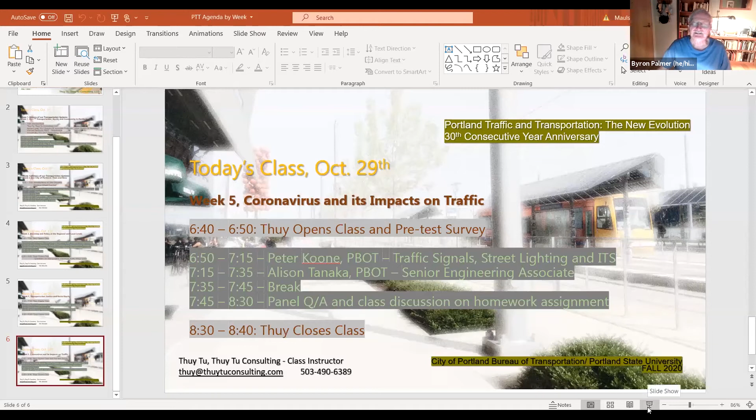I want to find out about the jurisdiction thing between ODOT and PBOT and how that works, how they interact with each other during the project. Yeah, that's a good question, because it differs. Good luck on finding that out. I've never understood it myself.

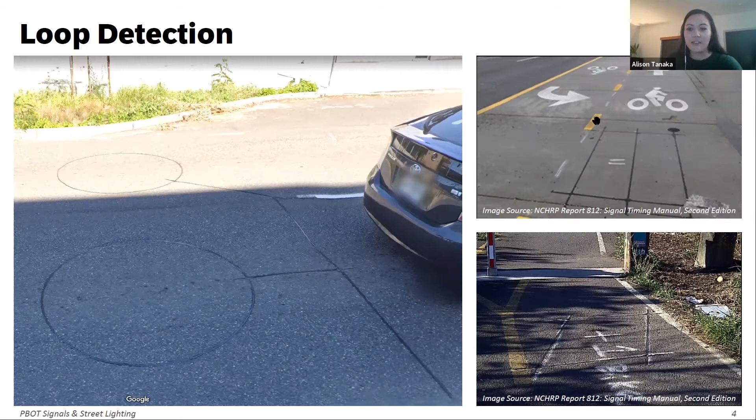So you can see examples of that on the left and right side. If you go to the next screen.

Another common way that we've been starting to collect traffic count data is through our radar detection. This is an above ground technology, and we essentially draw little zones with a software program. So instead of there being a physical loop in the pavement, we use radar technology to be able to see if a vehicle or a cyclist is at the intersection.

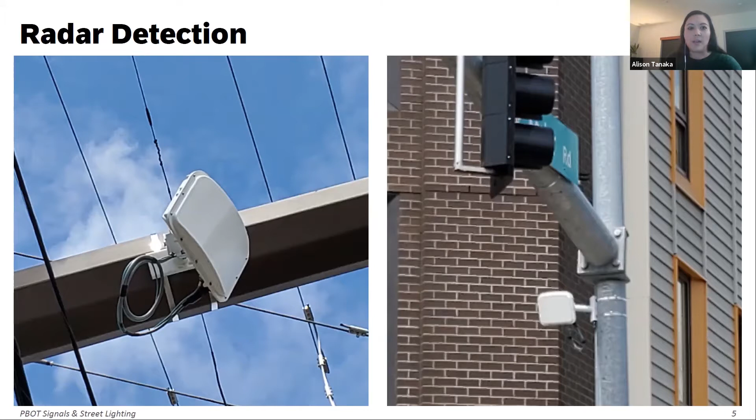And then I did mention pedestrians, and we use the push buttons most of the time to collect data about how many pedestrians are at an intersection, how many people are walking. So if you go to the next slide.

All of that information about the vehicles, about bicyclists, and about people walking gets collected in our traffic signal cabinets. There's one of these at every signalized intersection, and you can see there's a whole jumble of wires in there that go out to the physical pieces of equipment at our intersections. And then there's a large black box in the middle that essentially works as a computer to not only operate how the lights change green, yellow, red, but also can help us collect data about when those detectors are going on and off.

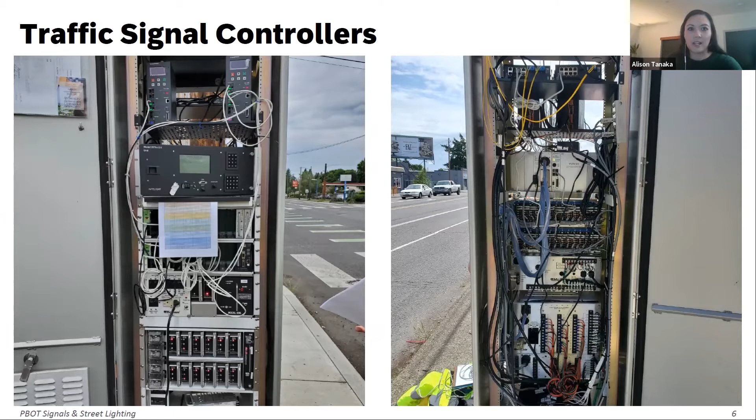So if you go to the next slide, and then maybe the next, looking at where our counts were taken, we have those in-pavement loops installed throughout the city. The best way that we can collect data about vehicles going over them, vehicles or cyclists, is to install them on the far side of an intersection so that people aren't stopped over top of them. It's better if we can get an on and then an off signal to do a count.

And so we have that type of loop detector installed at many locations, which you can see in the map on the left side here. And what we ended up doing was selecting 8 of those locations.

We needed a couple of things for our COVID analysis. We needed there to be data that was available before COVID, and we also needed those detectors to have a high communication quality, because even though vehicles might be going over top of them, if we aren't able to communicate to those computers, those controllers in the field, we can't get high quality data back.

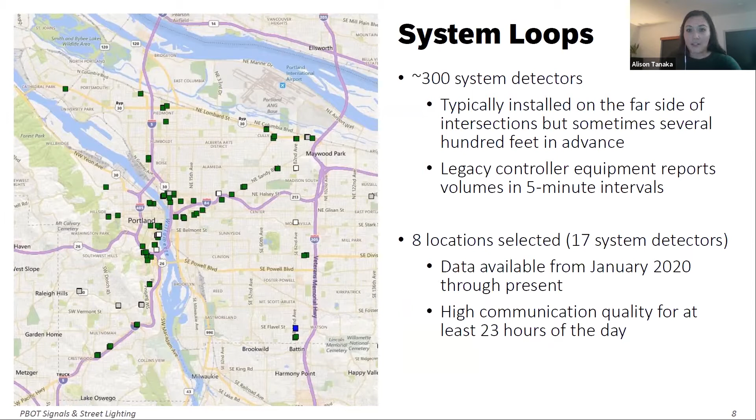So we needed both of those things to be present, and we ended up choosing 8 locations that had both of those things. So if you go to the next slide, we ended up combining those 8 locations.

We combined the physical loops in the ground with some locations where we installed tube counts. You probably noticed in different parts of the city, we have those black pneumatic tubes that go across the roadway. There's usually 2 of them, so we can tell which direction a vehicle is traveling. And those are able to give us counts as well.

We normally install them on a temporary basis if there's a project going on, in order to see how many vehicles are maybe traveling on a corridor. But for this COVID situation, we installed them throughout the city on a longer term basis than we normally would. So we have these 2 sources of count data that we could use to track our COVID traffic volumes.

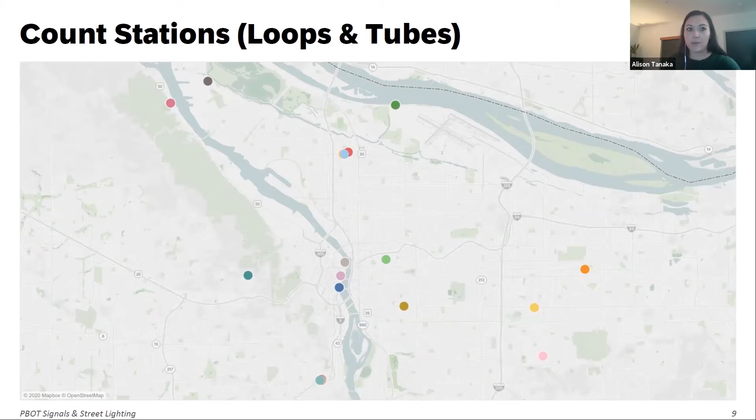So if you go to the next slide, and then maybe the next one, we wanted to look at how traffic has changed this year. This is daily traffic volume data from those 8 locations where we have the physical in-the-ground loops.

So you can see that traffic changes on a weekly basis. There's small bumps for each of those colors, and those are weekday volumes versus weekend volumes. So every weekend there's a dip in the traffic volumes that are coming through.

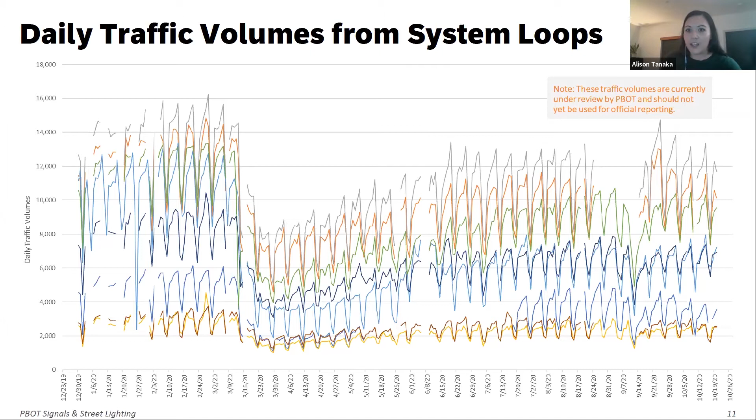So you can see that over the course of the whole year, we had a really steep drop off in March when the stay-at-home order was issued. Ever since then, traffic has been slowly creeping back up. But then we had the wildfires, which also resulted in a pretty big dip in traffic just a few weeks ago. So if you go to the next slide.

We started to take that daily data and try to figure out a way to normalize it, because some of our locations are in low traffic areas, some are in high traffic areas. And you can see that there is a big difference between all those different count locations on the previous slide.

So we needed a way to see how traffic volumes were really changing. That was what everyone was most interested in: how much has traffic been reduced as a result of COVID, and then how much is it creeping up each week.

So what we ended up doing was comparing our data to a baseline. For the loop locations that we didn't have data from many previous years, we looked at a baseline from earlier this year before COVID, before March. And for our count locations, in a lot of cases, our baseline was from previous years when we had taken a count for a project. We normalized all of that so that we had this sort of zero point to compare against for all of our locations.

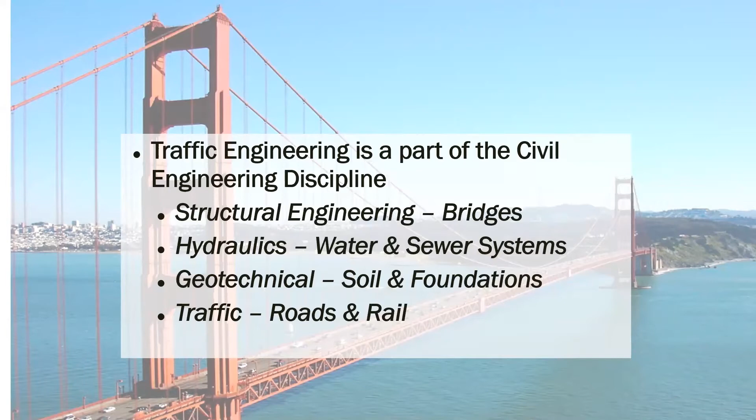Pretty easy, right? You never want it to fail. So we can define failure. I love to always point at Washington, that Seattle-Portland rivalry - look at what Washington's doing, ha ha. Not really, I'm not going to laugh at them. But they had a bridge failure - a truck hit the bridge. Luckily nobody was killed. But they had a bridge failure. I can define what failure is, and that's what civil engineers like to do. We don't want signal poles to fall over, we don't want buildings to fall over, we don't want structures like this to fall over.

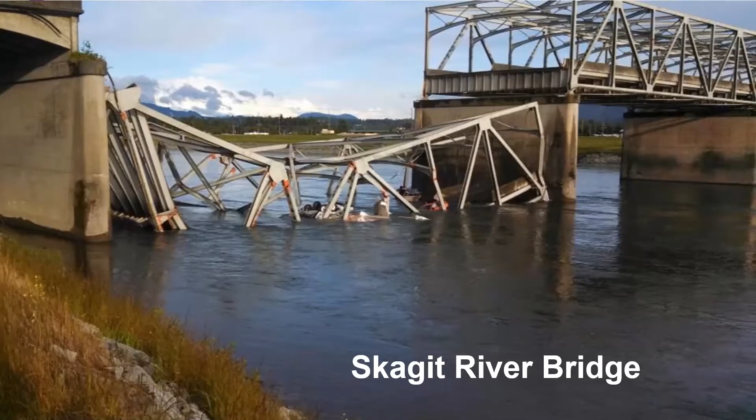But what is failure for a traffic engineer? How do we define that? All right, here's your quiz - get out your pencils. Here's your Jeopardy, we play like Jeopardy with our traffic engineering students. So I'll take Traffic Level of Service 101 for 100. So that's the question: what is failure? And I have to ask it in the form of an answer. It's the Highway Capacity Manual - that's what we use.

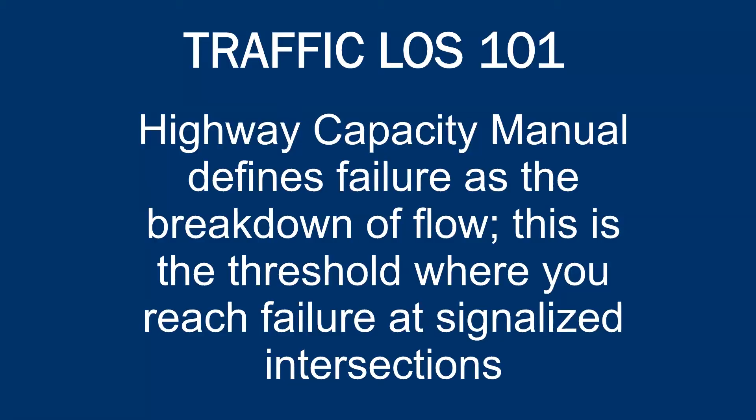It defines failure as the breakdown of flow. So what is that threshold? I asked you this poll question, so I'll give you the answer now: it's 80 seconds per vehicle. The magic number that we have defined in the Highway Capacity Manual - 80 seconds per vehicle. So think about that a little bit. What does that mean? So you're sitting at an intersection - after 80 seconds, you can call me up on the phone and say, Peter, you failed, 81 seconds. What is going on? Why are you failing all the time?

And here's my answer in reply to that: that's a terrible measure, I hate that measure - 80 seconds of delay per vehicle. The problem with that measure is that it doesn't even consider people. It's just considering vehicles, and when I define vehicles from the Highway Capacity Manual, it's not thinking about bikes at all - it is only thinking about cars. And that's our problem as an industry, is we need to think about people.

So we are thinking about people. And the other thing that we'll introduce, because we're thinking about this more and more, are inequities. Historical inequities are things we have not traditionally considered, and we need to as we think to the future.

Okay, and we don't think about bike improvements. So one example - somebody said, this is my favorite signal, I love it because I'm surrounded by bikes and I feel safe. You're right, that's exactly the sort of conditions we create. And some of the tools we have think about these things, and some of the tools we're just making up as we go. So that's the good news - we're willing to think outside the box and we're not just using our standards.

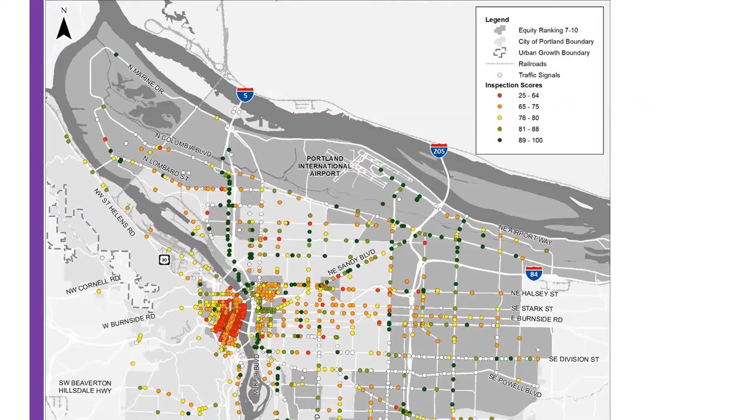So where do we go from here? I've posed a lot of things, told you there's some wrongs we're trying to right, trying to think about these things differently. This notion of enforcement is a big issue for us - we're trying to figure out what our relationship is with that. How do these measures move us forward? We're asking different questions. I think about what's bringing people to the streets and protests. As I joined in on some of those protests, it really hit home that we need to think differently about how we move people together and how we treat each other in the right of way.

Next slide. So let's give you a case study from the Hawthorne Bridge. I always like to try to put things in concrete terms.

Let me do a quick time check and see if I have time for this, or if I should postpone it to after a break. How much time do you need - about 5 minutes? I can make it 5 minutes. Okay, because I'm scheduled for a break at 7:35.

Perfect, we'll do it. So I'm sure most of you are familiar with the Hawthorne Bridge - this is my commute home, so it's personal to me. I'm a bike commuter. I did your mode split calculations - you guys are very bikey, so I'm with you. Every day I ride my bike. So let's go back in time with this Hawthorne Bridge.

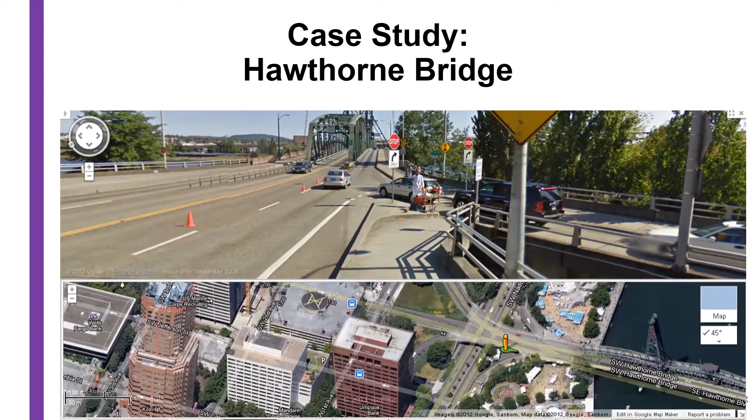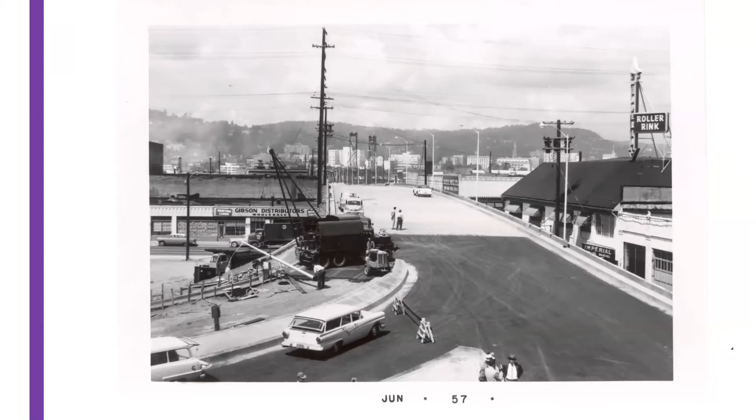Next slide. This is the Hawthorne Bridge approaches in 1957. How's that for cycling infrastructure? Beautiful, smooth pavement, great old style cars just rolling on by. Not great - that was built for speed. Look at those big, wide streets. That's a recipe for unsafe conditions for people walking and biking.

So go to the next slide. This was it - you're crossing over a highway ramp, good luck. We actually had a bike lane back in 1991, but bikes were yielding to the car traffic. Not great. And then if you got past that first ramp, you had the second ramp.

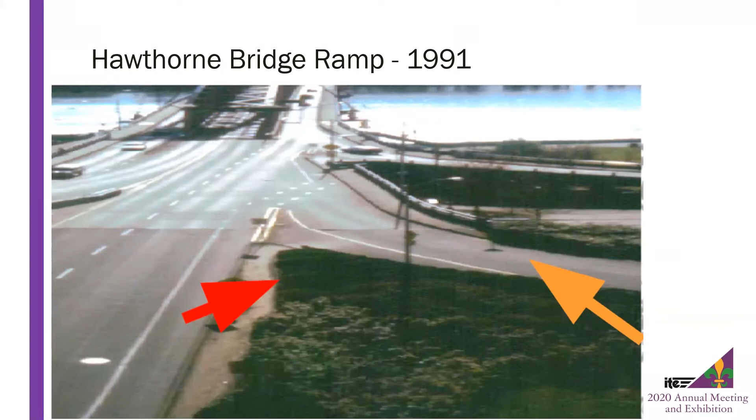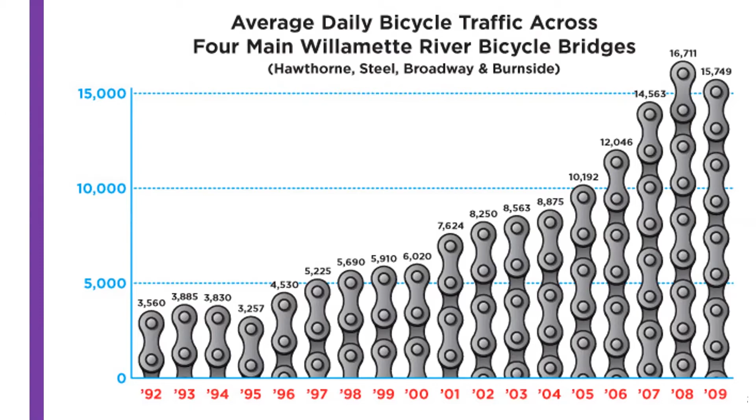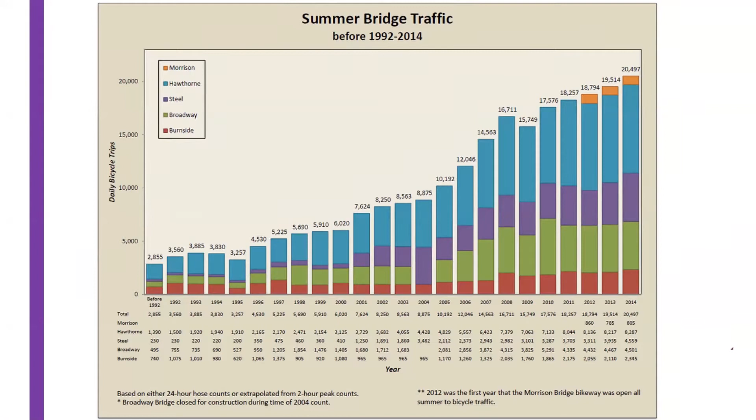And of course there's a lot in, so it's beyond 2009. I told you about that bump in the road. We continue to grow, and I need to update this slide, but it's continued to be something that the city has worked on year over year. So these things take time to build. Next slide.

And that's it. Was that five minutes? How am I doing for time? Right on, that was awesome. Thank you. You have to expect the guy in charge of signal timing to be cognizant of how much time he's taking, to be right on.

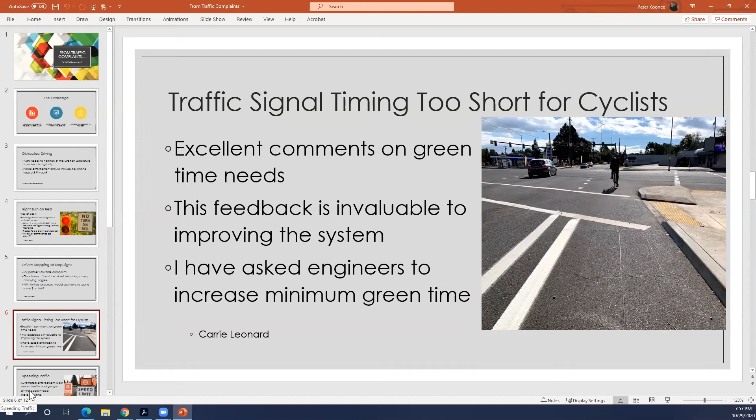Okay, speeding traffic. Yes, Megan and Byron. So I hate speeding traffic too. This is the number one risk factor. High speed traffic is where we have deaths. And if we're really focused on Vision Zero, then we need to be pulling out all the stops to figure out how do we curb that behavior.

Automated enforcement, I think, to me, it's equitable. We're going through a process to figure out what does the community think. Commissioner Hardesty was really strong in terms of making the question be clear that she was worried about exacerbating the existing relationships that we have with the community. And that is the right answer, the right question, and we don't have that answer. So we're working on that. We're being thoughtful about how we expand our system if we do expand.

So more to come on that. It's also in the safety team, so this is just my opinion that we should be expanding them very thoughtfully. The good news is with ticketing, one of the things we do that's very, very smart is we don't want to ticket people that are lower income. So we do give the option of classes. You can take a class and say, I've learned my lesson, and hopefully not you, and then you don't have to pay the fine.

Twee, you want to chime in and guide me here? Yeah, I sent it to your work email. The other four new... complaints. Well, we'll see if I get those. Let's see.

Questions from the chat. Okay, Tilikum, yes, got that one. Bill asked about the law - what law, I'm sorry. You can skip that, Peter, it already got answered.

Green time - how do I define green time? Did Alison answer that one? She did, yes, she did. All right.

So Julie wrote, maybe I don't have any questions. No, there's a question that if you start with Julie at 7:57, she said, I wrote about this in my survey, but there's a terribly placed no turn on red sign at an intersection in my neighborhood. Why would the city go through the trouble of putting up a sign where no drivers will see it? I can explain that, I don't know if it feels very specific to me, but...

If you're on Rosa Parks heading eastbound and it intersects with MLK, there's a right turn only lane, a straight lane, and a left turn, meeting MLK, which is pretty big. There's a bike box that used to be there - it will return, I assume. But there's the no turn on red sign for the cars. Instead of hanging by the light, it's sitting across four lanes of traffic, like on the pole, where it's not visible to anyone. It's only visible if you're standing as a pedestrian, so you can see the cars aren't supposed to turn.

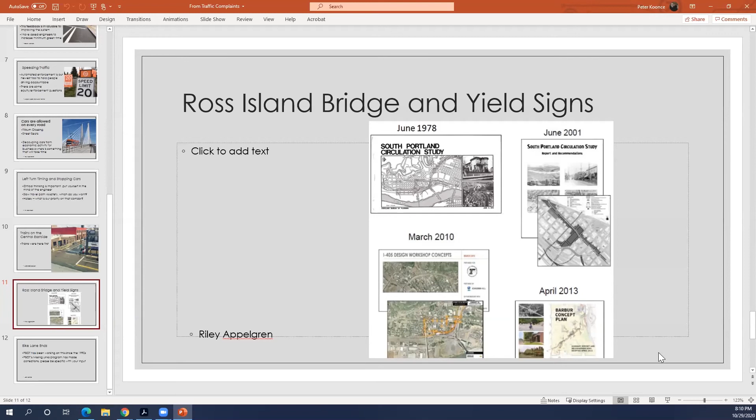And then the last one I had was from Josh, about bike lane ends. Boy, this is a perfect thing to end on. It's something I talked about in my presentation. We really will benefit from this if you're out there biking and see things. We have a little bit of money in the PBOT Missing Links program, so you could call up and say, I'd really like this to be on the Missing Links program. Could you just make this connection, extend this bike lane?

I have a couple myself that I've put in there. And in this era, we'll be trying to make sure that program is focused more than ever before on equity. So thinking about, if you're from a more affluent part of town, how do we respond to your request versus somebody who isn't as well off and needs the treatment. These are the sorts of things we try to prioritize to the level best, and equity is another angle we're really emphasizing, trying to understand how best to prioritize. It's something we can always improve upon.